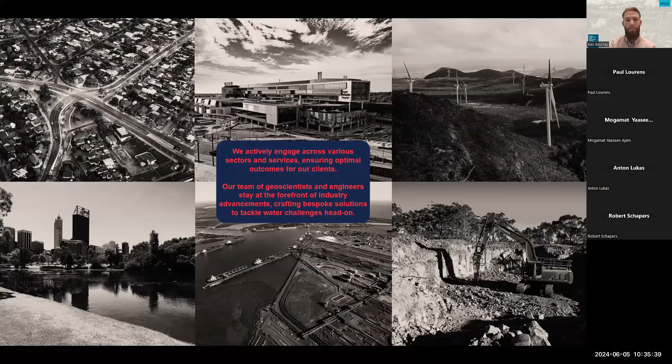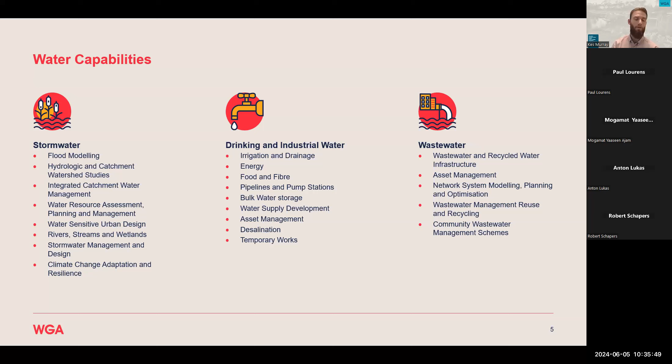These are a couple of pictures pulled from different sites that we've worked at, specifically in the earth sciences and hydrogeology space. We really try to stay at the forefront of the industry and tackle water challenges with unique, bespoke solutions, targeting individual problems that crop up within water management projects, which leads quite nicely into managed aquifer recharge. Across our water sector, we're not just dealing with drinking water supplies, but we also look at stormwater as well as wastewater management and all the rest of that.

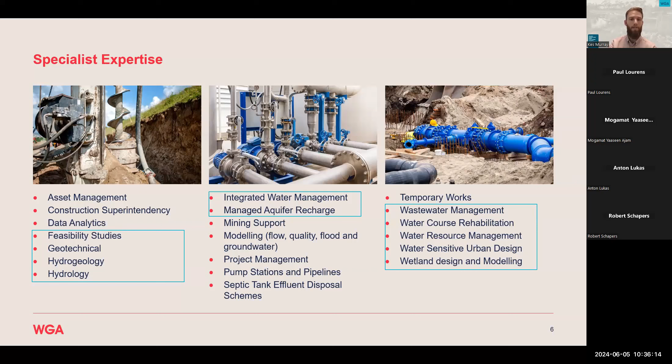We have a couple of key areas with specialist expertise across the water group. I've outlined a few that might be relevant for this talk for those interested, but key to that I think is probably integrated wastewater or integrated water management, managed aquifer recharge, and then how that ends up feeding into water-sensitive urban design, which is a big buzzword topic these days that we get involved in. So I'll set the scene briefly. I think most people attending this might have seen this publication that came out at the beginning of this year.

It ended up being put out through a variety of newspapers as well, but it was originally published in Nature at the beginning of the year. It was essentially a global look at how groundwater resources are performing on the international scale.

As you can imagine, if I'm setting the scene for a drought resilience talk and a managed aquifer recharge talk, there's going to be highlights of declining groundwater trends. In this study, over 170,000 monitoring wells, about 1,700 aquifer systems across the world were measured, and there were a lot of greater than 0.5 meter per year groundwater level declines across many of those monitoring systems.

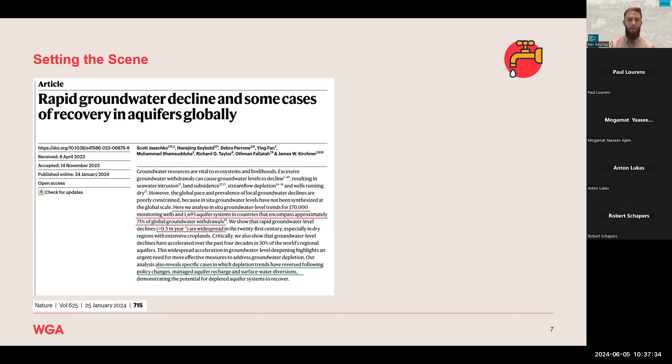Interestingly, towards the end of the abstract section, there's also a couple of reverse trends where declined groundwater levels have since been recovering. Those are attributed to either policy changes, specifically managed aquifer recharge, and cases where there's surface water diversions. These are some of the monitoring well trends looking at how much change has occurred in the monitoring data, I believe over about an 8-year time period - I might be off by a year or two.

But more importantly, they also looked at broader aquifer systems, which mostly reflected similar patterns. You can see a zoom in at the bottom for South and Southern Africa, zoomed in further under image G. Where they had data of the aquifer systems there, they tend to be in the orange or the red, not in the blue or the green.

So that's sort of the scene in terms of addressing drought resilience and setting managed aquifer recharge up as a tool to do so. I'm going to go through the presentation quite quickly.

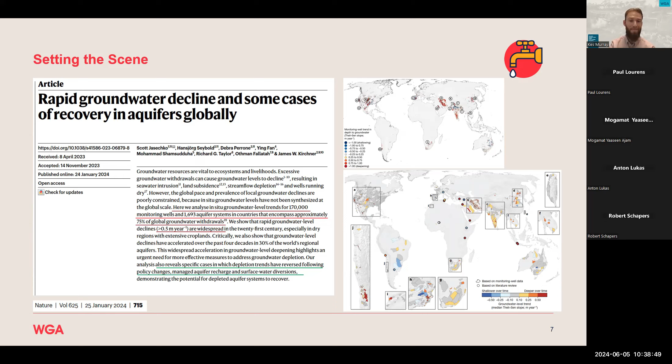So just a couple of images on managed aquifer recharge to set the suite of technologies that we have. There are many high-end professionals that deal in very niche aspects of managed aquifer recharge. Some people just deal with injection, some with aquifer storage and recovery, or aquifer storage transfer and recovery, some with infiltration trenches and ponds.

But there's a whole suite of methodologies available. Some of the interesting ones are stuff like at the bottom left, the soil aquifer treatment - that's an aerial shot of one of these sites in Australia where they're doing soil aquifer treatment up in the Northern Territories. There's a variety of different methods by which we can get available water sources back into aquifers, or for the first time into aquifers, as quickly as possible.

The top left photo is some of the larger infiltration basins in the world. This is out in California, and I had the pleasure of visiting a couple of them at the last ISMAR conference, which occurs every 3 years. I'll have a slide on that at the end as well.

Top right is a local favorite of mine - it's the groundwater replenishment scheme in Perth. This is an advanced wastewater treatment facility which re-injects, I think, in the order of over 100 liters per second back into the deeper aquifer, replenishing groundwater abstraction being used in the area, and helping with the water balance.

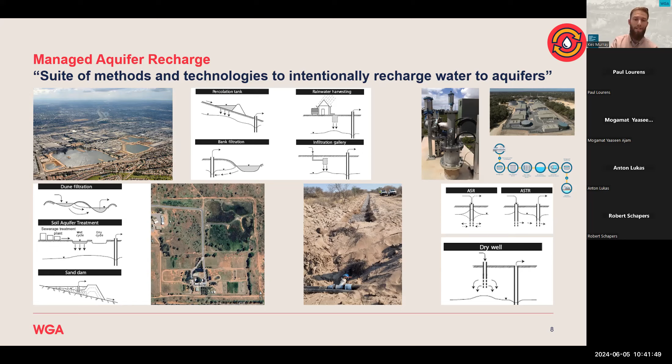Very interesting to see that applied close to where I live now. I always touch base on this when talking about Managed Aquifer Recharge, because I try to encourage as many people interested in it as possible to use it.

This is IGRAC, the International Groundwater Resources Assessment Center. They have an online MAR portal which keeps a record of international MAR sites. What's nice about this website is that they've filtered a lot of the information according to several different categories.

You can see the objective of the MAR scheme outlined by color coding—ecological benefit, or something of environmental benefit, not just storage, water quality, or reuse for town supplies. You can see there aren't that many environmental-benefit schemes relative to, for instance, the water quality management schemes set up in Europe.

It's quite interesting to use this platform when considering new potential schemes, to look at what influent source water type was used in a specific area and filter according to that. If you're considering the design or feasibility of a new scheme, you can look at other schemes worldwide that used a similar water type inflow.

Maybe it's stormwater harvesting, treated wastewater, river flow, or transfer from one aquifer to another. You can find references to those international projects and look at whether the method they used is something specific you're wanting to try at your site.

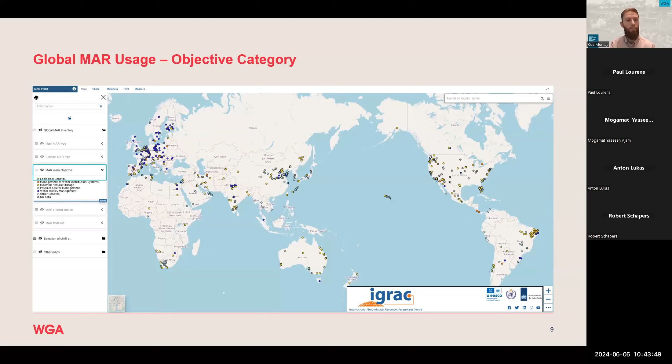It's quite a good background reference tool to get in contact with people who have worked on and published on these schemes, and to see what went right, what went wrong, and what volumes they were able to achieve for an injection bore or borehole versus a massive infiltration basin.

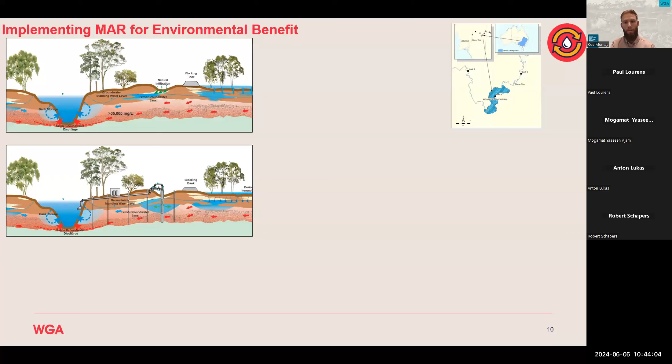This is a site we worked on as WGA in Australia—a Managed Aquifer Recharge site specifically for environmental benefits, the Katarapko floodplain. There's a large floodplain around the River Murray which floods every couple of years at whatever frequency, and the residue of that leaves behind salt deposits along the floodplain.

The vegetation there is adapted to some brackish to saline water quality, but in some cases there can be large areas of vegetation that die off because of these residual salt deposits from the floods.

Generally, if you've got enough rainfall, you'll have some freshwater supplies helping the system. But as rainfall declines and diminishes, the idea was to collect fresher or lower salinity water out of the creek or river and transport it back inland, a little buffer way in.

This was a trial setup, not the full application of the scheme—transporting water inland and re-injecting it into the aquifer to facilitate a freshwater lens within the saline aquifer. This isn't for human consumption; it's about enabling vegetation to grow reliably as natural freshwater inflows to the area start diminishing.

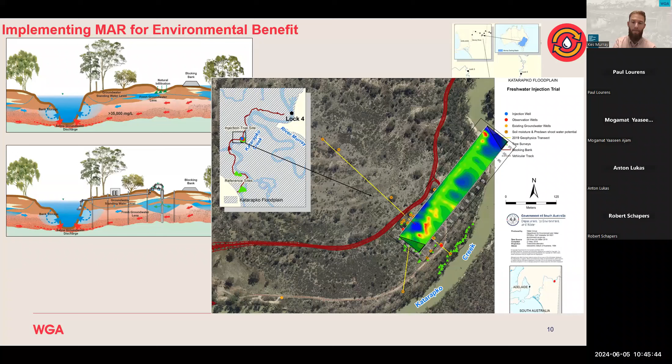This is the type of fun stuff you can do during a trial—run geophysics to see exactly if you can find the bubble of water you've put in the ground or not, and if not, why. This is another site, a totally different example.

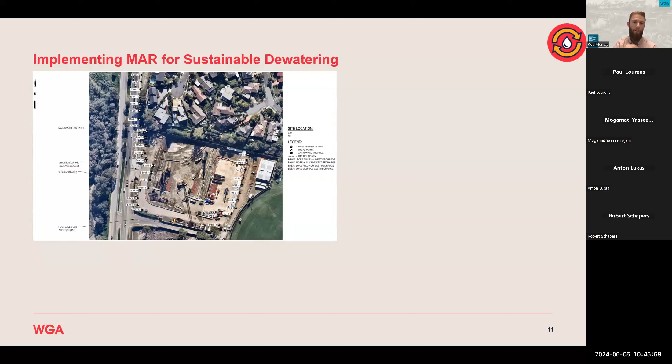When you're dealing with massive, large diameter sewer pipelines near a residential area, settlement is something that geotechnical engineers will tell you is a bad thing, to use the technical term.

On the western side, there are also groundwater dependent ecosystems which are environmentally protected. So essentially, we set up a reinjection scheme around the site to hydraulically buffer the drawdown outside the site while still enabling dewatering on-site to do the temporary works there.

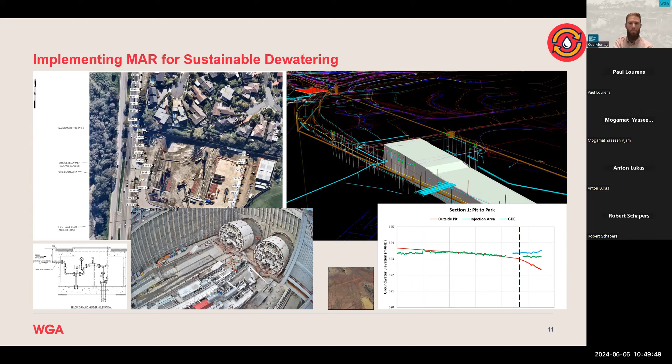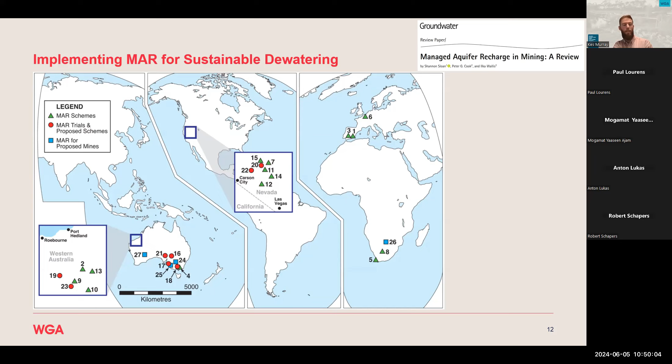Just to take a short detour - there was actually a publication last year on implementing Managed Aquifer Recharge for dewatering sites. I won't spend much time on this, but it's a worthwhile publication to take a look at, not least just to see the scale that some of these people do things at when you go into the mining industry specifically.

I won't spend much time on it. Frequently, the types of volumes we're used to talking about with boreholes and groundwater supply - in rural areas we're talking 1 to 3 liters a second, half a liter per second, 0.2 liters per second. Sometimes if we're lucky, 10 liters a second. And frequently, when we're talking 10 liters a second, 2 years later we're actually talking 2 liters a second.

These guys are reinjecting at 185 liters per second when they started operations. In 2023, it's about 4 times that - well, it was about 4 times that last year.

I'll skip through some of this. This is another specific site - these guys are probably the leaders in terms of total volume. They have abstraction out of a saline aquifer, so for environmental purposes they can't push that excess water down a creek. They're now on the order, as of 2024, of 5,500 liters per second that they're reinjecting.

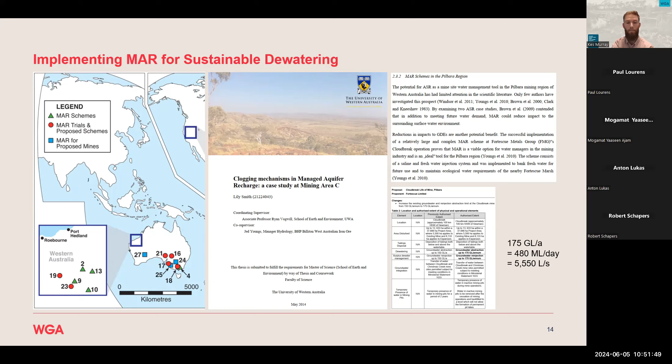This is not to say bigger is always better, or who's the best, that type of thing. This is to say this is a proven technology and methodology that can be applied across a variety of different settings. So when we're talking about secure water supplies, drought resilience, environmental protection, it's not to say we're not entirely sure where the water is going to go, or not entirely sure how to apply these methodologies. No - these methodologies have been applied for decades and they work effectively. We know how to do this as an industry.

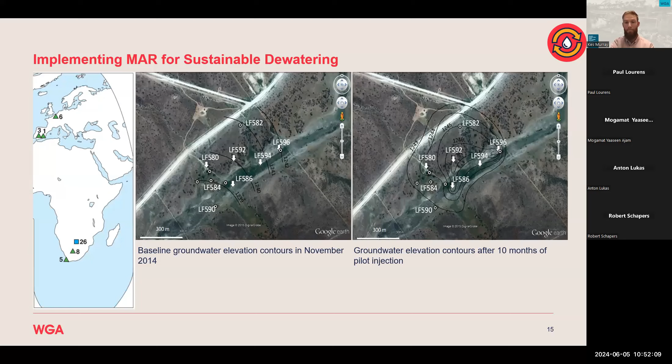Quick look, this is actually from a couple of years ago when I did my honors back in South Africa. One of the mines over there, we did a 10-month trial to pilot injection, created a little mound under the drainage channel over there.

Big thing to understand when you start getting into injection-based managed aquifer recharge schemes is what the aquifer is doing and what your injection holes are doing. You see the same thing on the dewatering or groundwater supply side of things. The sustainability of the point at which you abstract water and the rate at which you can inject water is a separate thing from the sustainability of the aquifer system, or the rate at which you can get water into the aquifer system.

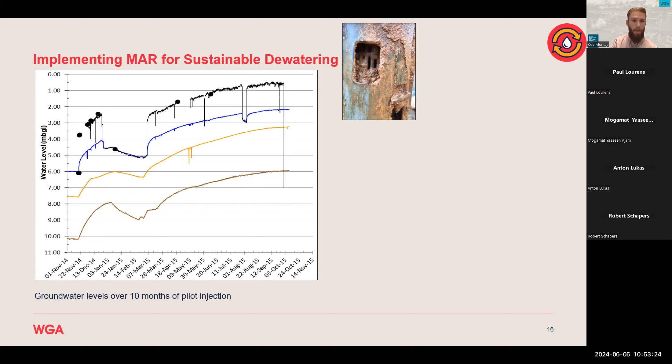It's a frequent mistake, or confusion, with people inexperienced in bigger picture thinking on groundwater aquifer systems, to mistake the performance of an individual borehole - whether monitoring or production - with the performance of the actual aquifer. It's similarly a mistake to look at the performance of an aquifer and try to infer the performance of a specific production borehole, especially when dealing with complex fracture networks and dikes creating compartmentalization within the aquifer. But that's a little bit onto the technical details.

One of the major things we need to overcome with managed aquifer recharge via injection and infiltration is to make sure we don't clog our recharge sites. This is what clogging looks like if you've got iron, suspended solids, muck and clay and stuff in the sites. The same thing happens in an infiltration basin.

Particularly with an infiltration basin, the risk you run is when you go in to clean the stuff out, the equipment you bring in, usually quite heavy machinery, ends up compacting the bottom of the infiltration basin floor. So you have to have quite careful designs prior to the clogging occurring, to allow the cleaning crew and equipment to come in, scrape away what's there, and move it out without overly compacting the bottom of your infiltration site, because as it becomes more compacted, your effective infiltration rates going downwards will decrease.

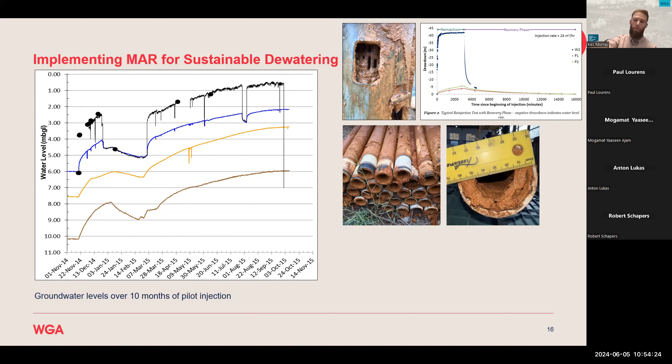The infiltration rates outwards through the sides of the pits will still be fairly good.

So this is one of my favorite graphs. It applies to all things hydrogeology and also to managed aquifer recharge. It's the Dunning-Kruger effect - a graph of confidence versus competence. Usually the reason I put this graph up is partially a warning to myself and partially a warning to other young water professionals. The term 'young' should give you a pretty good indication of where you might be sitting on this curve. It's important not to be too confident coming out of university studies, because there's a bit of a learning curve just ahead. Hopefully that drop down to the valley of despair isn't too painful, and then we can start becoming a lot more competent.

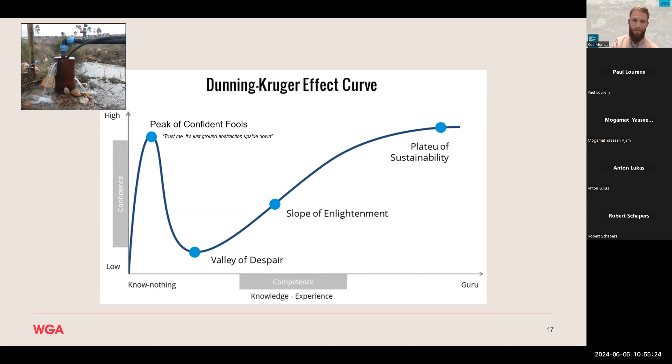If we don't get that right on a re-injection site, we end up spilling water out on the surface.

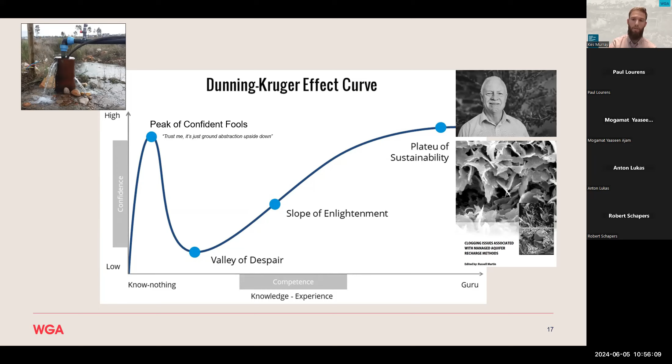Usually what we're trying to do on these projects is get a guru involved. The local guru that I turn to is Russell Martin - he's our water sector group lead at WGA, with a couple of decades of managed aquifer recharge experience. He's also written, and this can be found through the IAH website, there's a managed aquifer recharge working group, and within that a clogging monograph that Russell compiled with published texts and case studies on how managed aquifer recharge systems clog, how to predict clogging potential, and how to manage it. Go check that out if you're interested.

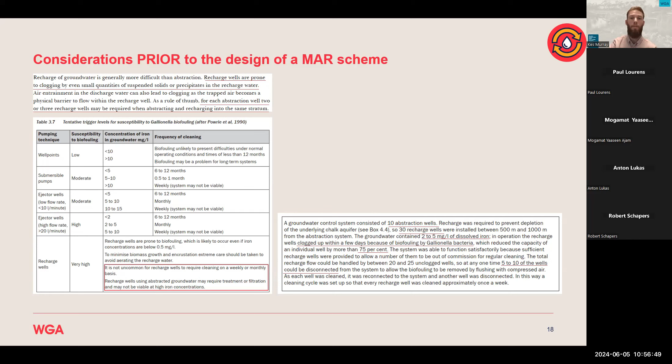A quick look at a couple of things to consider prior to designing a MAR scheme. It's well known that recharge wells will require some sort of backflush frequency to manage the expected level of clogging. Occasionally you can get away without any backflush, usually dependent on good source water quality naturally, or good source water quality treatment. But by and large, one of the things that needs to be accounted for in a reinjection scheme is an understanding of how frequently you're going to need to backflush.

If you don't backflush, the clogging that occurs in the screens means that for the same rate of water injection, the required pressure within the bore, which translates to water level under gravity systems, starts rising. And if you don't have well-constructed headworks like the picture we saw earlier, that will spill out on the surface.

If you do have well-constructed headworks, it means you'll start pressurizing those headworks, which you can design for. But at some point, you end up exceeding safe operating pressures. And what that means is you pressurize the bore and its construction to the point where the pressure will lift the injection bore, start lifting it out of the ground. Usually before, don't worry, it's not going to get too far out of the ground.

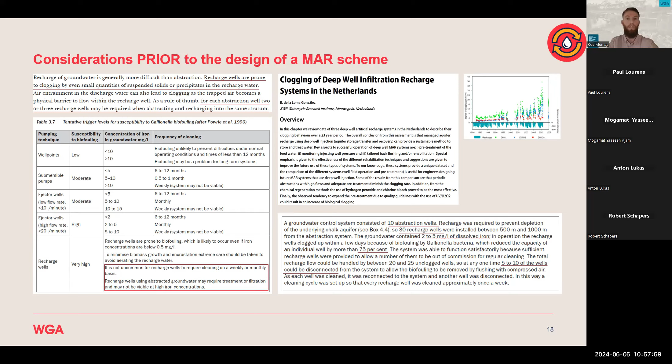So something to be careful for, or considerate of, is why we get so concerned with clogging - it's not just about getting enough water into the aquifer, it's also about managing the infrastructure that we use to get that water into the aquifer.

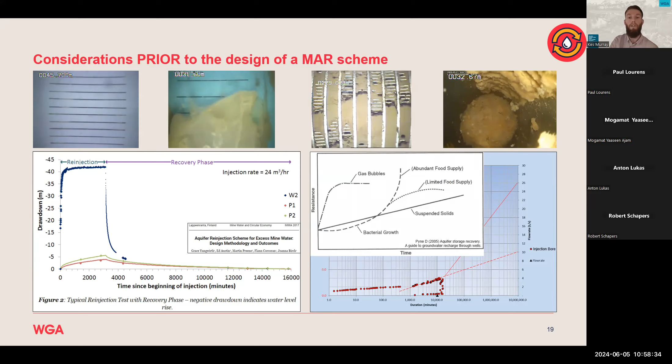So there's a couple of downhole shots of what some of these things look like. Some of those photos are from Australia, some from South Africa. But generally what we want to do is understand the potential concerns chemically, as well as for physical clogging and suspended solids in the water, and then have an understanding of how we expect our aquifer to perform during injection, as well as what we expect to start happening when there is clogging, so we can have early warning detection for that.

As a general guide to taking on a new managed aquifer recharge project, there's usually a hydrogeology component at the beginning. This is why there tend to be more pre-feasibility and feasibility studies than there are MAR schemes, certainly in South Africa as far as I'm aware, but in the rest of the world as well. This is an important component to get right, because the engineering component of designing a MAR scheme is equally important, but it's dependent on having the hydrogeological understanding correct.

What I'd say is most important is having a good understanding of not just what the data and information tells you is possible, but the amount of variability that can be expected to occur within that. As an example, if you're looking at an aquifer storage and recovery site, you might want to be banking water for a couple of years in case a drought hits in five years' time.

It's important to know how much storage we expect we can get into the aquifer, and what rate we think we can get it in. But if we're wrong, how wrong are we? Having an idea of how wrong we are is a really important detail when we feed this hydrogeological information onto the engineers, because that influences things like the size of pipes, pumps, valves, filters and operating procedures, and all the rest of it.

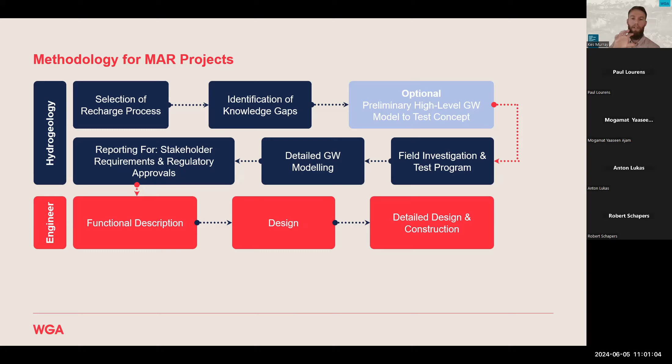So the hydrogeology feeds into the engineering design. This goes through several phases of design, and there's a whole raft of complexity there before it goes into the actual construction, then commissioning and operator training. These three sections - hydrogeology, engineering, and operations - each of those red arrows tying them together is where there's the most potential for communication gaps and for information not to correctly flow through to the operations of a system.

One key concept that highlights this very easily is the idea of talking in units - liters per second, cubes per day, megaliters per day, gigaliters per year, all of those interchanges.

That's just converting between the units isn't the real issue. The real issue is the peak capacity of the different components of the system. We might require infrastructure that can allow us to inject, as an example, up to 10 liters per second. But we know that most of the time we're going to be injecting 2 to 5 liters per second. We also might know that the total volume is not going to be the equivalent of 5 liters per second 24/7, but more like half a liter per second 24/7, with huge changes in flow rate depending on what our source water supply looks like.

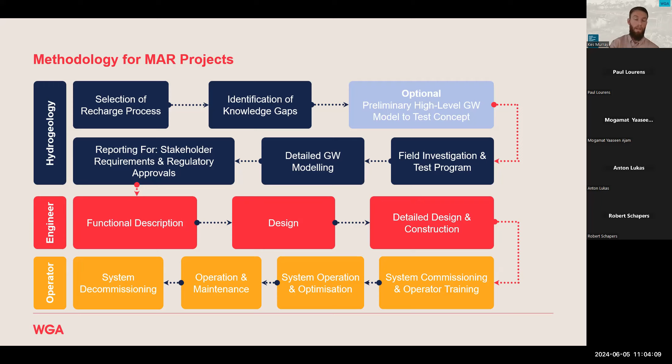So those nuances between injection rates, variability, daily volume variability, and annual volume variability feed into the policy, permitting, and licensing side of things. But those nuances are the types of things that end up getting dropped between the hydrogeology and the engineering side. And similarly, when it comes to the programming and logic control of these systems, which end up being mostly remote and automated, those decisions need to follow through as well - when do things need to backflush, how do we make sure we're not backflushing too frequently. All of those types of decisions. So just a word of caution on those connections.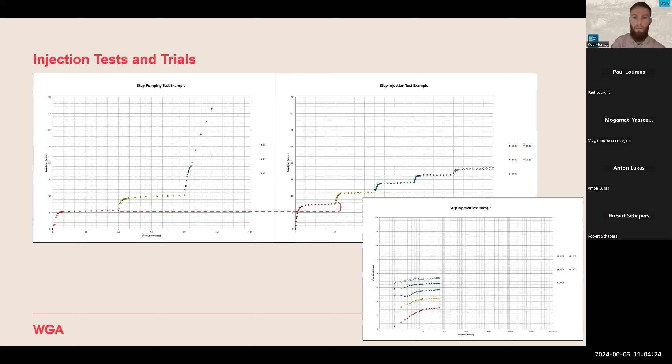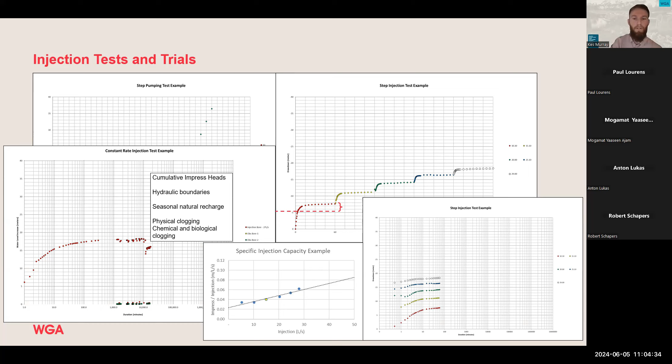I'll skip through this, I think most people have seen a pumping test. An injection test looks like a pumping test upside down, except you generally end up getting different parameters. I won't go into the technical details, but it's important to do an injection test, and if you're not going to, it's very important to be conservative on your estimation. Some of this tells us about how aquifers respond to pressure changes, through analytical models of either a pumping test or an injection test. It's important to get a grasp on this and understand it, especially when dealing with a fractured aquifer, which a lot of Southern African aquifers are.

When you start dealing in a fractured aquifer, some of those plots - H, N less than 2, and I greater than 2 - relate to fracture network geometry. The Barker solution has a bit of discussion on that. There's some quite good South African literature on the expected long-term performance of groundwater levels under pumping conditions in fracture networks, and they tend to go to a fracture network geometry of N less than 2, frequently closer to 1 or 1.5.

That has quite important implications on long-term extrapolations of test pumping data, and the same for injection data. So it's important to have some sort of conceptual understanding to marry to your test analysis in designing what rates you're going to inject under. For all of these graphs, you can picture them the other way around - these would be rising pressures in your bores. If you've designed everything correctly, that means your headworks are sealed and everything operates smoothly. And if you haven't, it means either something's going to pop out of the top or you're going to have water spilling out on the surface.

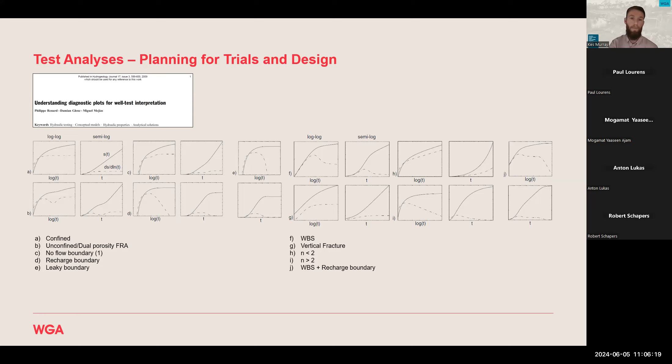But you end up with some fairly complicated headworks. These are looking at aquifer storage and recovery sites, which means that the water injected into the aquifer gets re-abstracted out of the same hole. But you frequently have this type of headworks even with just a dedicated injection hole, because you need a downhole pump to be able to backflush your injection bores.

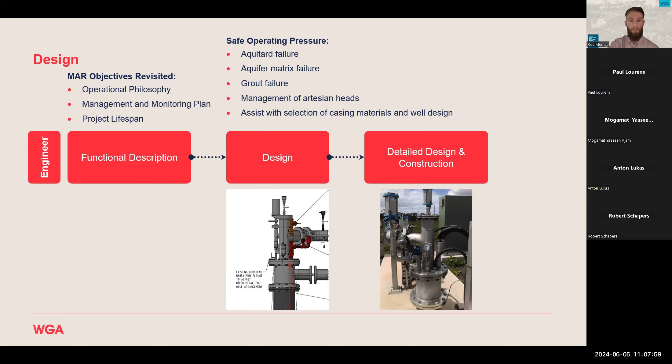A couple of the key considerations there are in selecting the length of screen that you have in that borehole, or casing, or where that's cased. You're going to need as much screen length as possible in primary aquifers to manage your flow velocities, but you also need them starting as deep as possible so you have an available working head area for when you backflush the bores. So quite a detailed, nuanced borehole design goes into all of that.

And that's mostly the end of my presentation. It's just sort of general awareness around managed aquifer recharge.

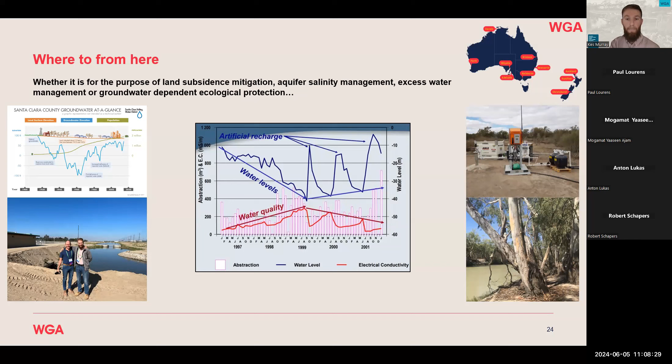That central image is a South African site where groundwater levels were recovered and water quality was reduced in salinity by doing a little more of an enhanced aquifer recharge than a managed aquifer recharge, but it effectively demonstrated the potential of what could be happening there.

I'd like to take one or two minutes if I've got a bit of time, which I hope I do. Paul, will you shout at me if I haven't got time? I will do that. Okay, great.

So I mentioned it earlier, the ISMAR, the International Symposium of Managed Aquifer Recharge. It occurs every 3 or 4 years, in a different country each time. I was lucky enough to go to the last two, which was in California in the States, and Madrid in Spain the time before that. The next one is going to be in Stellenbosch, South Africa.

I would really encourage anyone interested in this field, whether from a hydrogeology, engineering, water management, or hydrochemistry perspective, to really consider presenting, submitting a poster, or even just attending. The thing I've found going to these conferences is there's a core group of international professionals in this field who go around to each of these conferences to catch up with each other every couple of years.

I've been to conferences before where you're almost worried about how much information you share. These ISMAR conferences are more like, if you could picture a very excited eight-year-old child who's been working on a project at home for a long time and can't wait to share it with their classmates. That's the feeling of these type of conferences.

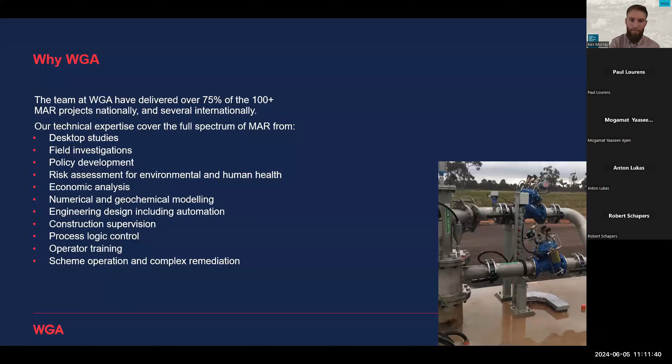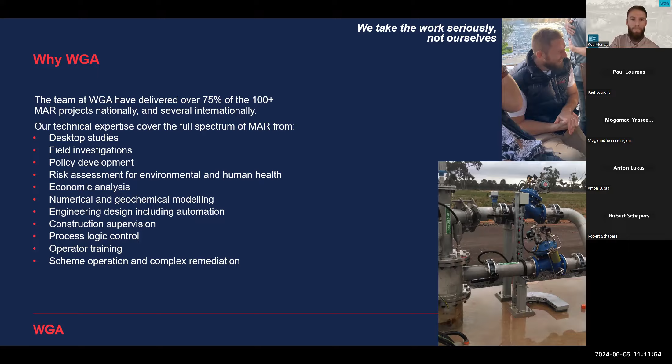So here's a snapshot of a couple of the managed aquifer recharge projects that we've worked on. And with that, I'll close. Thank you very much.

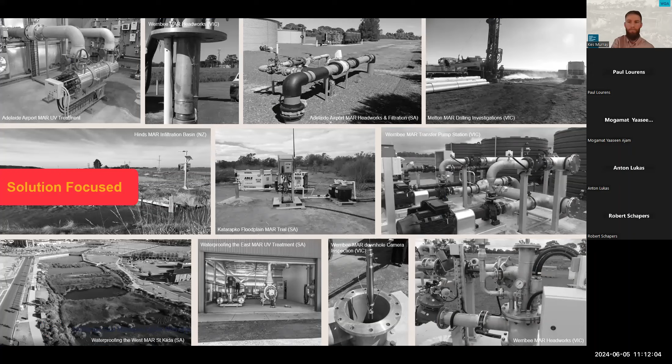Thank you, Kes. Great presentation as always.